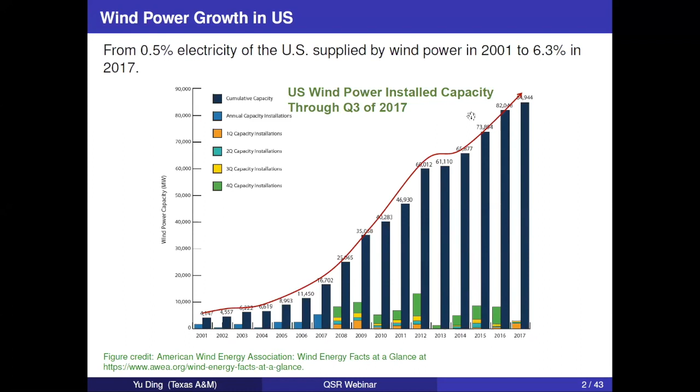So wind energy has grown from a very tiny player to a quite sizable player. It's one of the front runners among renewable energy sources. Solar energy compared to wind energy right now, this year, is almost like wind energy was 20 years ago, about 0.5% of electricity produced by solar right now.

About 10 years ago, around 2008, the US Department of Energy published a white paper and then revised it subsequently. Initially, the white paper was called '20% Wind by 2030.' The idea is the DOE contemplated scenarios where wind energy would contribute electricity produced and used in the nation: 10% by 2020, 20% by 2030, and 35% by 2050. If you think about that goal set by the DOE, it's not really very easy to accomplish.

If you look at the history, the increase from 0.5% to 6.3% took more than 10 years. Every year the increase in percentage is less than 1%, and we only have about 2 more years left until 2020. So to achieve 10% by 2020 from 2017, you'd have to increase more than 1% every year, and that may not necessarily be very easy to accomplish.

Also, from another angle, the 35% by 2050 is actually quite a big deal. If wind produces electricity at the level of 35%, you can imagine solar probably will provide electricity at 20%. So altogether, these two sources would give you more than 50% of the electricity used in the nation. If the proportion of hydropower and nuclear doesn't dramatically decrease—as nowadays they stand at 20% and 16%—then if you add all these carbon emission-free energy sources together, they'll give you 90%, 91%.

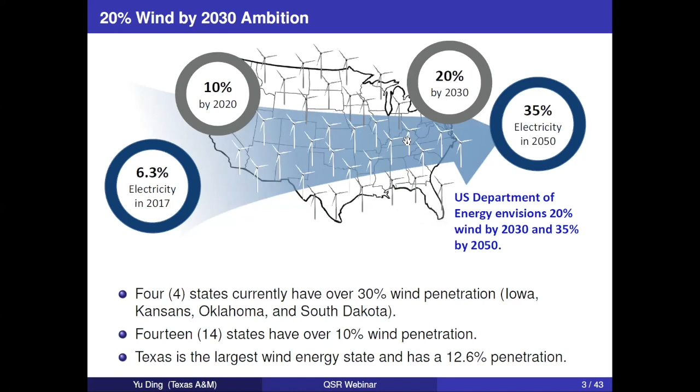One of the challenges to wind energy growth is still the marketability and market competitiveness, because for a long time wind energy cannot really compete in the market by itself. It's actually being subsidized by a mechanism called the Federal Production Tax Credit, or PTC.

Now, if you want to roughly consider what kind of energy really makes money in the marketplace, you can think of this magic number: about 5 cents per kilowatt-hour. That's the wholesale electricity price. And of course, when we use electricity at our house, we have to buy it at a much higher price, like 10 or 11 cents. That's the retail price.

So the wholesale price is 5 cents. If you can produce electricity around or below 5 cents, you're almost guaranteed to make money. If you do that at 7.5 cents, you are not competitive. In between, it sometimes depends on time and location.

For onshore wind, the cost of energy in the past number of years has been reduced to between 6 and 7 cents per kilowatt-hour. The offshore wind is still much more expensive - it's out of the range of being even close to competitive. But we have plenty of onshore wind farms.

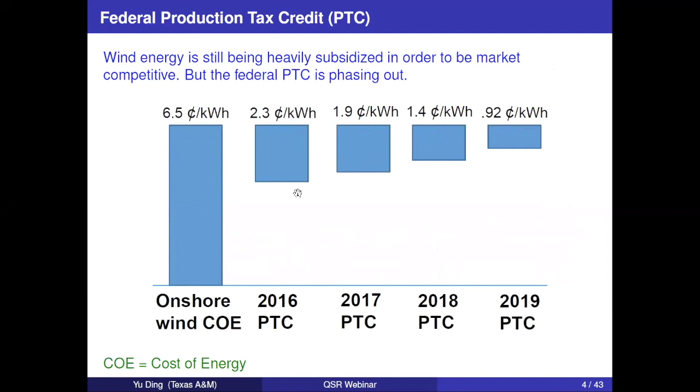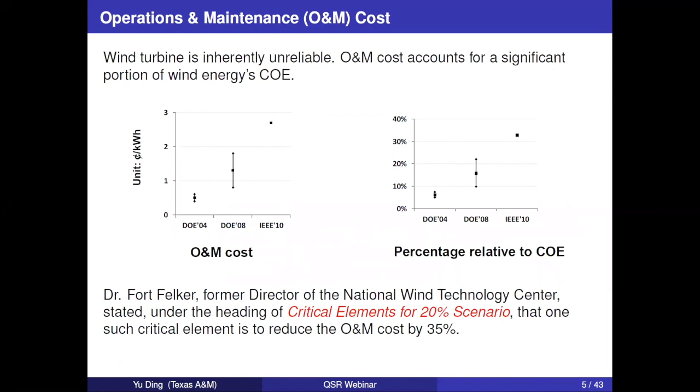So if you go back to the previous figures, if we have 6.5 cents per kilowatt-hour, you get a 1 cent reduction from the cost, and obviously you get a very significant improvement in the competitiveness of wind energy. So that highlights the O&M part - cost reduction is one of the major challenges, and also an area needing a lot of research and development.

So why is wind energy or wind turbine unreliable? This factor is really deeply rooted in the operation of wind turbines.

As you can easily imagine, wind energy is called a variable renewable source. So the driving force for a wind turbine is changing all the time. The wind is not something we can control.

So the non-stationary wind force, in fact, subjects a turbine's drivetrain to a constant fatigue load.

An analogy we often use is this: if you drive a car almost constantly at cruise speed, mostly on the highway, you'll have the car for a longer service life. But if you rarely get on the highway and instead drive in a busy city with a lot of traffic lights, stopping and starting frequently, you're going to have a shorter service life for your car.

The car driving in city life is really the type of analogy for the wind turbine, because the wind is not controllable. Sometimes you have strong wind, sometimes you don't, and the very persistent, strong wind driving the turbine to rotate doesn't always last very long. So you have the turbine going up and down in a very frequent changeover.

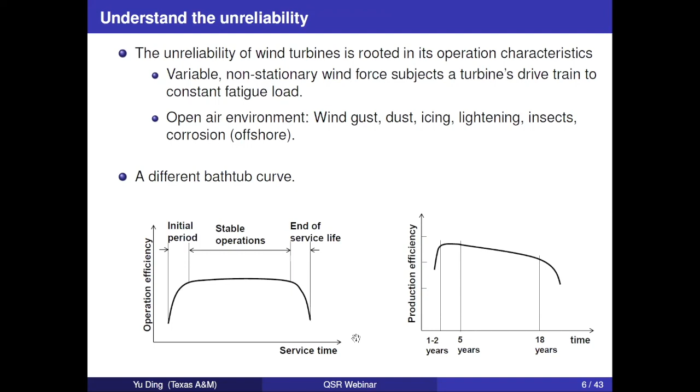The challenge or difficulty in wind turbine O&M, operations and maintenance, can be summarized with 3 keywords: size, weather, and distance. The size of the turbine is huge.

Sometimes we don't really get that feeling because we typically see a turbine from a distance. But if you take this picture from an online source and compare this wind turbine with other structures - this is a new GE turbine, and the tip height is 853 feet, almost close to 300 meters. That's very high. The hub height, the middle part, could be more than 100 meters high, and if you compare it with the Eiffel Tower, it's slightly lower than that.

People ask, you have this large structure, why can it stand there for over 100 years, and what's the problem with wind turbines? But you don't really have moving parts on top of a tower like that, or the Empire State Building. Here you have this very large turbine blade constantly rotating on the nacelle, or on the rotor, so that exercises a very strong force.

Each of the blades is also very heavy. Even a blade of about 50 meters weighs about 16 tons. So a larger turbine weighs even more, and 3 blades together are almost 50 tons. That kind of size also causes other difficulties.

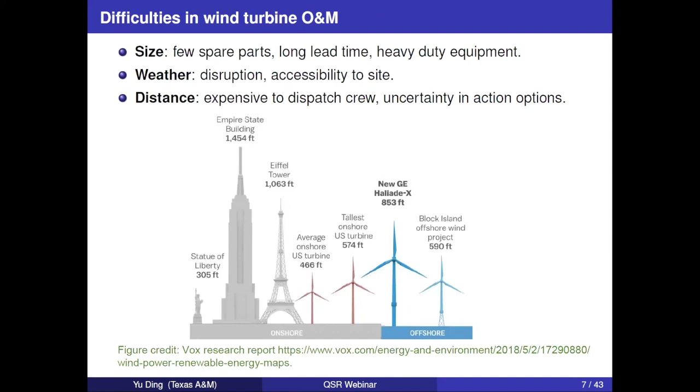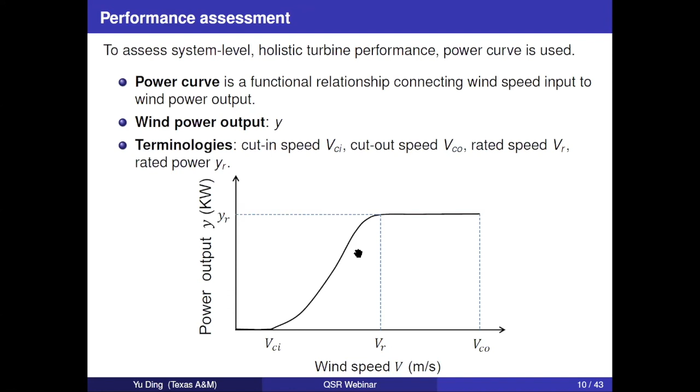And then if the wind becomes even stronger, to the level we call cut-out wind speed—this wind speed is too strong, for example 25 meters per second—a mechanical brake can stop the wind turbine at that point. So we have the reliability aspect and also the performance assessment, and the system level performance assessment is typically achieved by using this power curve.

So a data science formulation in wind energy: using the power output Y, and considering the variability or stochastic nature of the wind input, this can be expressed by a probability expression.

Here, P of X is the probability related to the wind field. It's not necessarily only the wind speed, but most likely the wind speed is the most volatile variable among all the environmental conditions. Then you have this conditional probability—given this wind input condition, how much power you're going to produce in the probabilistic sense. This is directly related to the turbine performance.

And then if you integrate out the X, you have the probability of Y, which is the probabilistic wind power production.

If we substitute Z, the extreme load condition on the wind turbine, into this equation, almost without changing anything, this equation still holds. Here the response is mechanical load Z, and still P of X is the stochastic nature of the wind field.

And then the conditional probability or conditional density, P of Z conditional on X, provides the understanding of the turbine's endurance. If you integrate out the X, you have the unconditional load on the turbine, and this is the probability of Z.

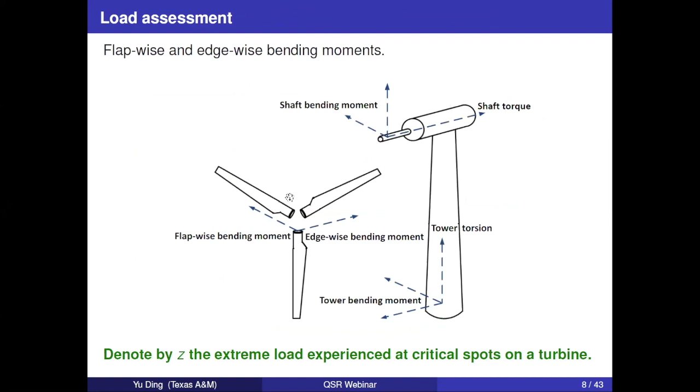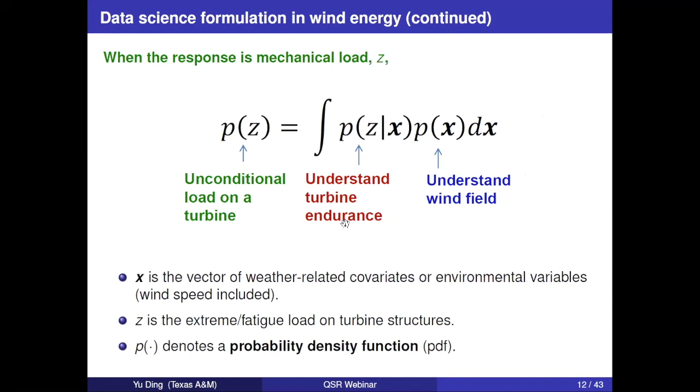And therefore, I can say with this design threshold, the L sub t we used previously, whether or not this is enough for me to avoid a catastrophic event happening. Does that help? Yeah, I believe that answered the question.

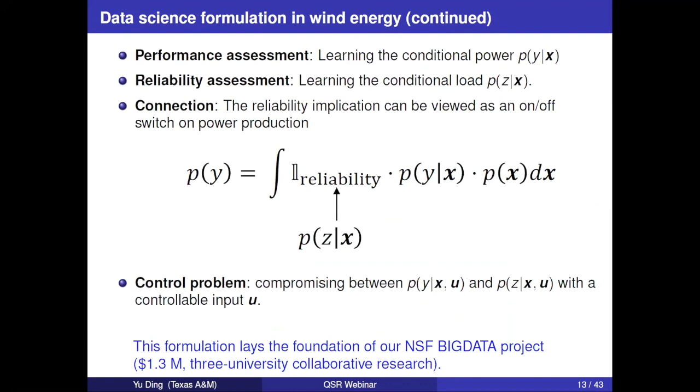Okay, so let me go a little bit further from these slides. One of the immediate questions, given the importance of performance assessment as well as load assessment, is: what do people do in industry? They must have been doing something, right? The type of method used is actually pretty simple—it's called the binning method.

The idea is very easy to follow. Suppose the response is a power output Y. So you have this kind of data—this is real data collected for one particular wind farm, a wind turbine. This is the wind speed, this is the power output. To get the power curve, industry simply partitions the wind speed into small bins, for example 0.5 meters per second.

For each bin, here is the amplified, magnified version. You can see this is bin number 1—all these red dots, the green dots, are in that bin, and you simply average all these data points, which is power data, and use this average to represent all the data points in that bin. You do that for the second, neighboring bin with all these blue dots, and average again. Now for the response, you can also fit, for example, a Gaussian distribution, or a skewed distribution like the Weibull distribution.

You can get a little bit of distribution understanding from that bin as well, for when the response is a mechanical load Z. It's not very easy to just use one simple average, because the extreme load is really related to the tail distribution. You want to calculate the tail probability.

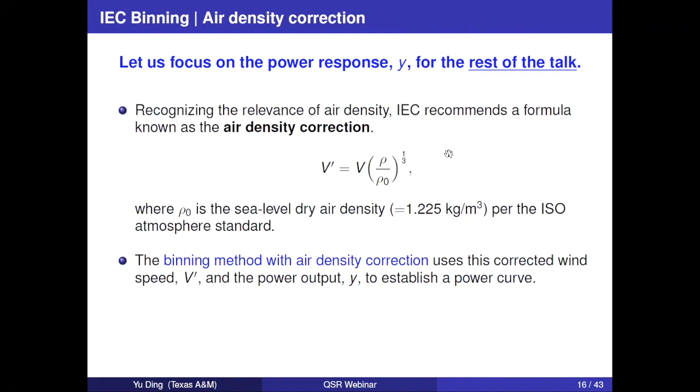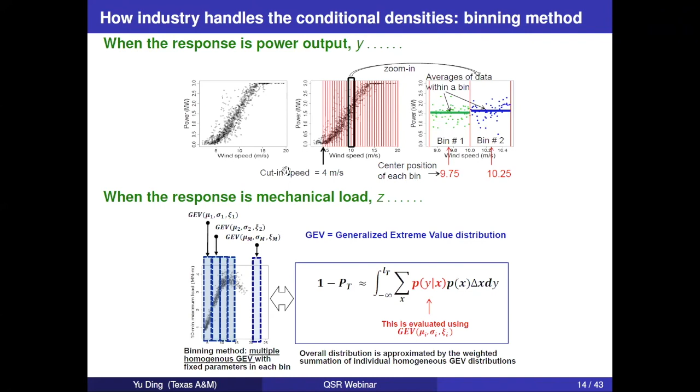Right, so this question is answered here. The power curve is generally provided by the wind turbine manufacturer. What they do for the power curve is take the data measured on-site when they do service or testing. So they have the wind speed data, the power data, and then they fit this power curve. So the power curve is very much a data-driven concept, and the way they fit the data is the binning method.

Does that answer the question? So, okay, the second question: do you just use a two-factor example to show that when more than one factor is taken into consideration, the binning method will be in trouble? Yes.

So I use the two-factor example because if you only have two factors, you're not necessarily in trouble yet. If you have like 50,000 data points a year with two factors, each with 20 bins, you still have a sufficient number of data points in each bin to either estimate average or estimate a constant parameter distribution. But typically we don't really have only two factors—you can easily go to 5 or 10 factors in a commercial setting.

And even with 5 factors, if each factor has 20 bins, you're going to end up with 3 million bins. You only have 50,000 data points. In the end, every 60 bins will share a single data point. You couldn't really do meaningful estimation anymore.

Is the data available online? Another question—no, most of the time the wind data is more kind of available. The power data you have to get directly from the owner of that wind farm.

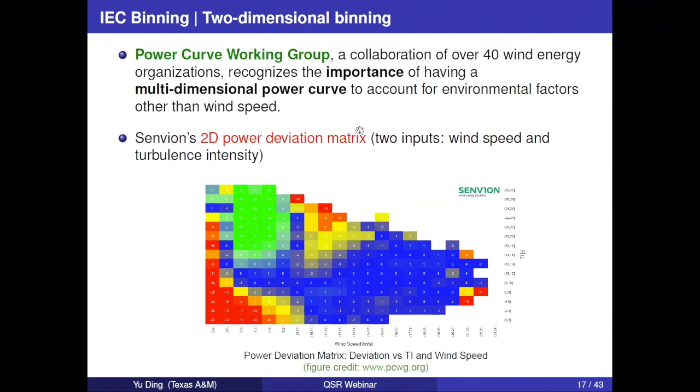Thank you. One question you probably didn't see from your screen is from Ranjin. He asked, how does one consider the spatial temporal correlation of both input and output variables in the model? That is not considered in this particular talk.

We discuss a much broader set of issues in the book. The first part is the wind speed, the wind field, which has really rich spatial temporal structure—we did some research along that line. The second part is more on single wind turbine performance, which is what we try to discuss in this talk.

For that one, we kind of isolate a single wind turbine to say, given this kind of input, how are you going to consider the output. There's also a little bit of interaction between this turbine and the neighboring turbine, which we sometimes call the wake effect, but there are special techniques to handle that.

We do have a paper about the wake effect which considers the spatial aspect in a more specialized way. That paper was published in the IEEE transactions early this year.

I see there's another question here—I think he figured out the answer himself. So I think we've answered all the questions. Okay, maybe we can go back to the presentation.

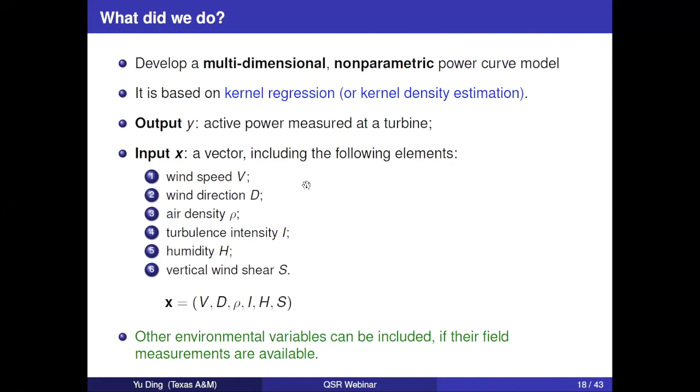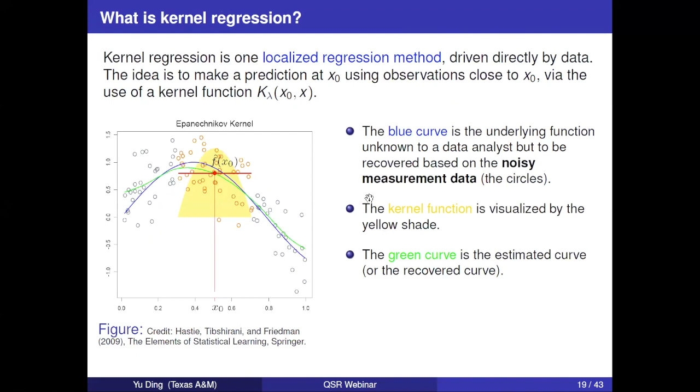I want to mention the IEC's method can actually be considered a special kernel method using a uniform kernel. The binning method works like this: you have a window, and if you're within the bin, you give a weight of 1; if you're outside the bin, you give a weight of 0.

Most kernel methods don't always use this kind of uniform bin. Oftentimes we don't use a uniform kernel function; instead we use a smooth kernel function, like a Gaussian kernel, which gives different data points a smoothly decayed weight away from the center point.

If you only have one single input, whether you use the uniform kernel function or the smooth Gaussian kernel function, it does produce some difference, but not a whole lot. The smooth kernel function will give slightly better results, which is why people like to use it, but the difference isn't very striking.

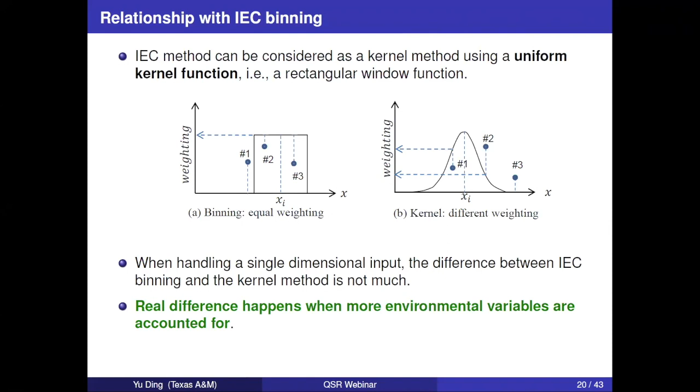The real difference happens when you incorporate multiple variables. If the uniform kernel function runs into a curse of dimensionality problem, the smooth kernel function will too. So you have to accommodate multiple input variables by devising some kind of model structure.

When designing this model structure, we make use of physical understanding, going back to the physical law of power production from those factors. There are multiple important factors, at least 3. There's a nonlinear functional relationship we don't fully know because the coefficient of power has other factors confounding with each other, and there's an interaction, because if you only use additive models, you're not very effective.

In the end, we came up with this hybrid additive-multiplicative kernel structure. It's multiplicative because each kernel element includes 3 elements to capture 3-factor interaction.

Based on physical understanding, we always have the first element as V, the second as D for wind direction, this is wind speed, and the third one changes with different environmental factors. We have an additive structure, so the whole model is scalable.

With 3 factors, you only have 1 kernel function here. If you have a 4th variable, it gets added to the second element. With a 5th variable, it gets added to the 3rd kernel element. This allows us to capture up to 3-factor interaction while giving the final model scalability.

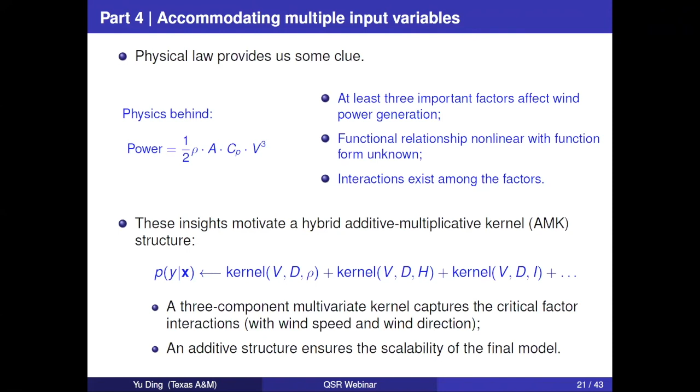What kind of impact can this make? When you compare this with IEC on multiple turbines, the error reduction over IEC is really striking—this isn't caused by randomness in the data. It's over 20 to 45%.

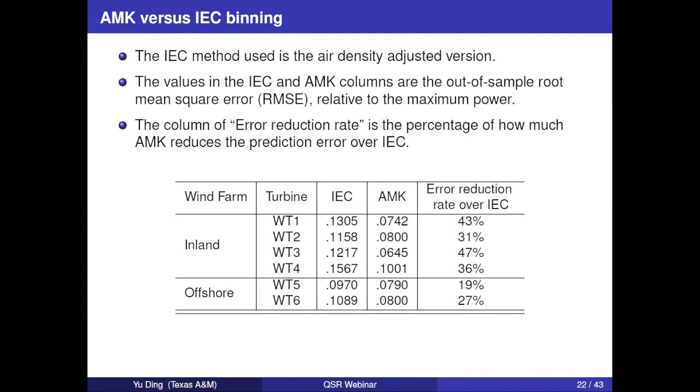We also compared with a number of other machine learning methods, because the IEC method is very simple and non-parametric, but doesn't really take advantage of recent machine learning developments. We purposely selected a few representatives for each branch of methods: KNN is a neighborhood method, SS ANOVA is a spline method, and BART is a tree method.

By comparing with these methods, you can see the AMK is pretty robust. Sometimes it comes very close to another machine learning method, but it maintains pretty consistent performance. In one case, it actually beat the best alternative by 14%.

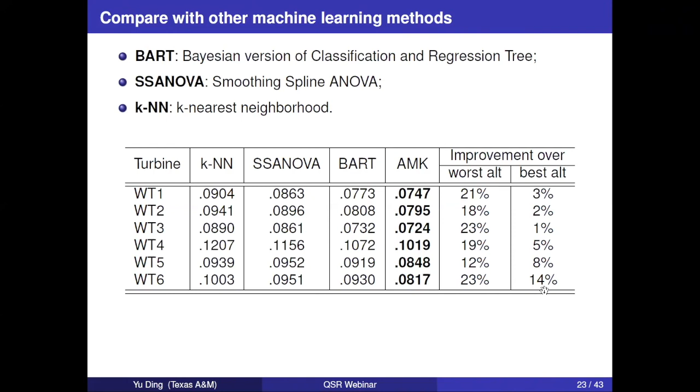So the question is, we have a better, more capable data science method which can give us a better fitting of this power curve and also account for multiple environmental variables. What are we going to use that for?

And we can use that for predicting for sure, right? So that is pretty easy to understand, and I'm not going to get into that prediction aspect here.

I want to go back to that reliability question we raised before. If you recall, we hypothesized the efficiency curve, this bathtub curve for wind turbines, is not really like typical machinery, which has a very long steady operation period. It actually has a noticeable faster decline after probably the initial 4 or 5 years. There's some initial evidence, data analysis to support this claim.

If this is true, people say, I'm not really ready to replace the wind turbine after 5 years, and it's a very costly proposition for you to do that, because installing a wind turbine is costly, and replacing that wind turbine is probably even more expensive. So what can people do about this?

There's a certain kind of technology innovation to retrofit a turbine generator, known as a turbine upgrade. Hopefully by that retrofit, you can lift this kind of curve up a little bit, even substantially, and therefore have a longer stable operating condition, just like other turbine machinery.

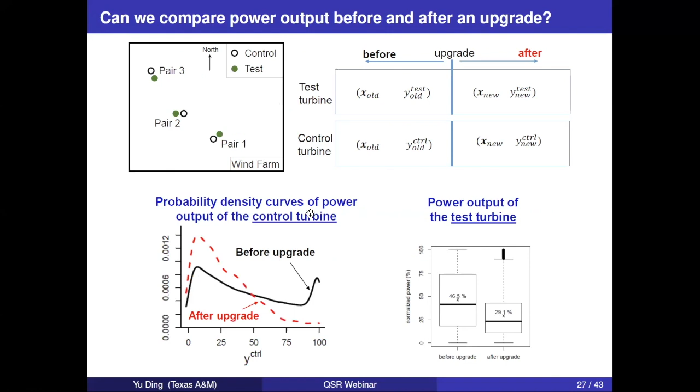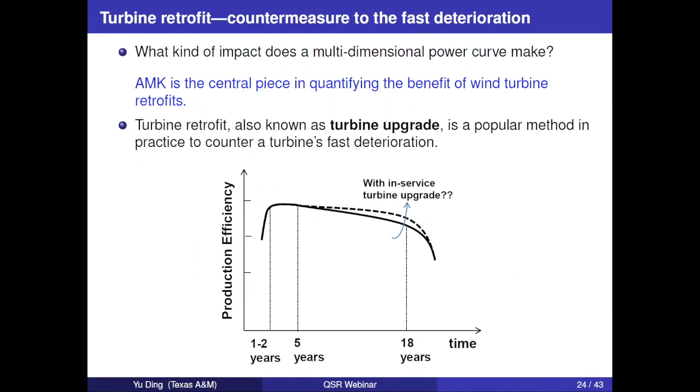But detecting this kind of small improvement in a very noisy environment is not very easy. If you remember all the data we've seen up to this point, the noise is much more than 3%. How can you detect this kind of small change and certify it's the correct detection and not just noise? That's become one of the main challenges.

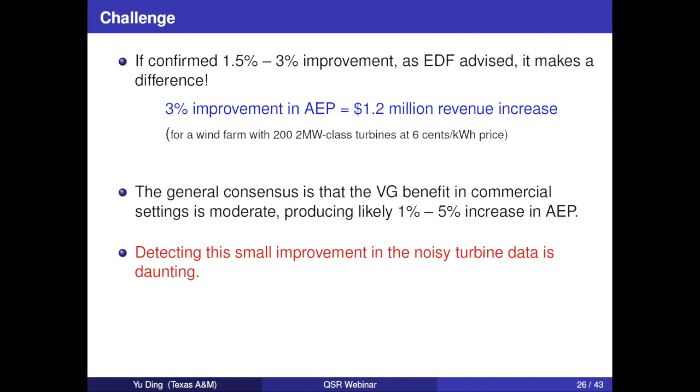Let me go to the part where we said why the AMK helps. The key issue is really controlling the environmental condition, because when you compare directly the difference between the power production before and after upgrade, even if you see a difference, that could be because the wind blows harder or weaker. And here what we do is we use the model AMK to capture the old turbine operation characteristic.

This is the AMK here. By using this model to train the AMK, it's almost a mathematical surrogate of the old turbine - almost like you take a picture of the old turbine and capture how it operates. And then you feed the X new to the model. This is like running the old turbine under the new condition. And then you compare this predicted output with your observed output. If there's a difference, it's more believable the difference is coming from the part you made the change to the turbine.

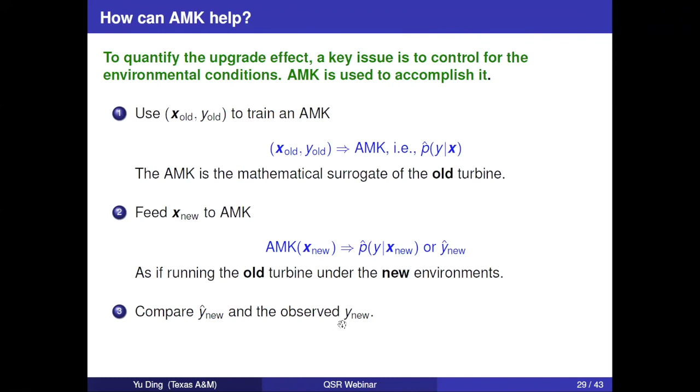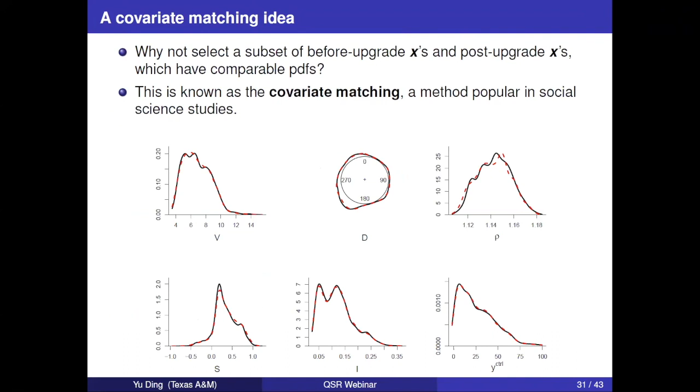Now this is the general story. Actually, when we dive deeper to solve the problem, it is not so easy - there's other complexity involved. And one of the complexities is related to the bias part, because it's different, but sometimes you have this kind of bias, and the bias also can run from 2 to 5%.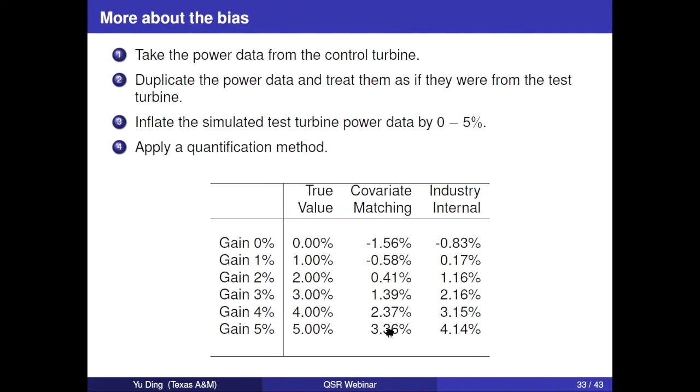And here is one of the slides - if you ignore this part, because it's a different kind of method - they basically said if we do the simulation study with the actual improvement we know, sometimes they have almost like 2% difference. Yet the one you want to detect is about 2%. So with that 2% difference bias, it's not very easy for you to pinpoint exactly how much effect you're going to have. Even sometimes you're going to be very hesitant to say it is positive effect or negative effect if your effect starts with a small number, for example 1%. But if you have 2% negative bias, you could end up with negative 1%.

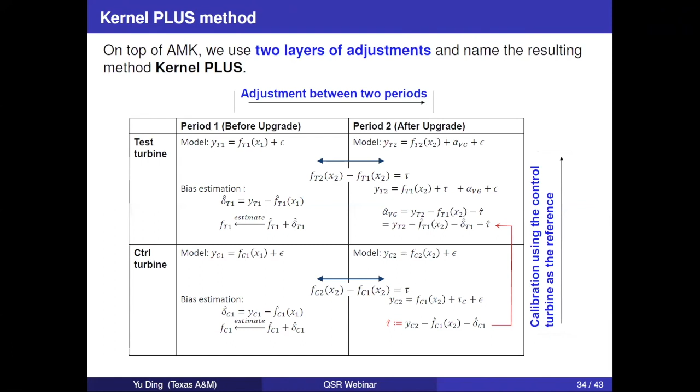Okay, so we did something to address that issue, and in the end we have a version of the kernel method. We call it the AMK kernel plus. It's really AMK with that bias correction, and we are not able to entirely eliminate the bias altogether, but we were doing much better than the existing method.

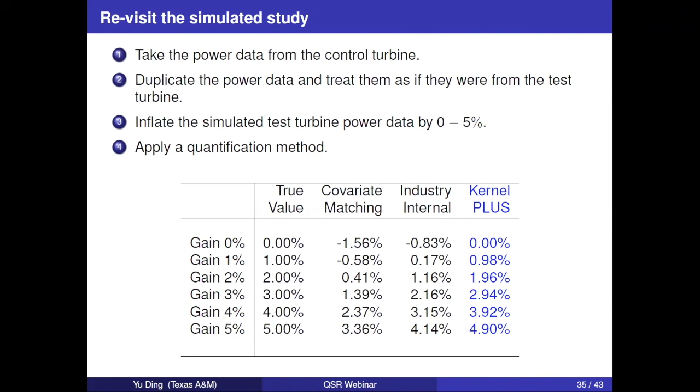But this is only demonstrated on the simulated result. And for the real power production, because you couldn't run the experiment, it's very hard to compare with the actual - you don't really know the actual upgrade effect. So people said, how can you validate this?

And we did a blind study with one of the major power companies. They provided us 3 wind turbines with the data, but they didn't tell us how many turbines had this upgrade added, or whether any turbine was upgraded at all. They only said there are 3 turbines, analyze the data and tell us what you see. So there were 4 possibilities: 0 turbines upgraded, 1 upgraded, 2 turbines upgraded, or all 3 upgraded. So we did all the analysis, and eventually we told them the 3rd turbine is the one being upgraded.

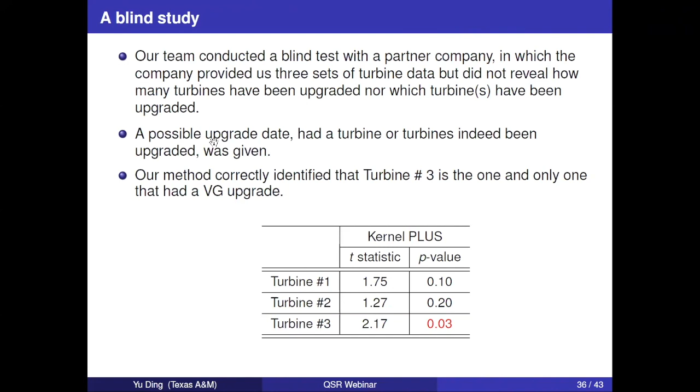They kind of confirmed our detection is correct, because they wanted to do the blind study without telling us the underlying truth up front. They were afraid we'd overfit the data just to try to confirm the result. So the blind study lent a certain degree of credibility to our method.

We also did a joint study with this small company, Smart Blade, because once they heard about our analysis and method, and they have their own internal method, they wanted to do a study with us. The study showed a high degree of consistency between their method and our method. For this study, they only gave us the data and asked us to do the analysis without telling us what result they had in the first place.

We did a 2 wind farm case study. One is a medium complexity terrain, and another is a very flat terrain analysis. In both cases, we saw a high degree of consistency between their industry method and our method.

Last year, upon knowing about the joint study we did with Smart Blade, EDPR, which is the 4th largest wind owner operator and has had a long relationship with us, decided to sponsor a year-long fine-tuning of this kernel plus method. We did extensive case studies with them using their own data, which came from 3 different wind farms, 3 different turbine types, and 10 pairs of turbines.

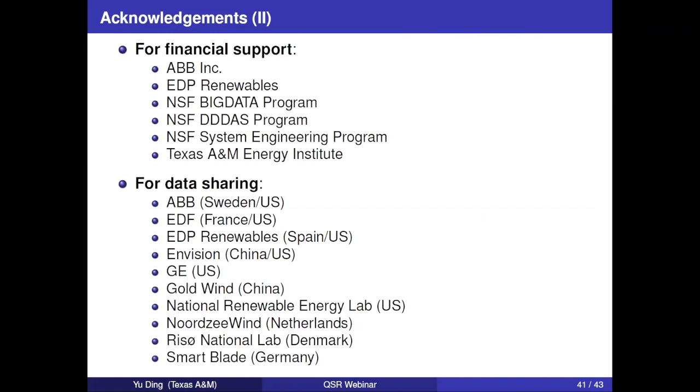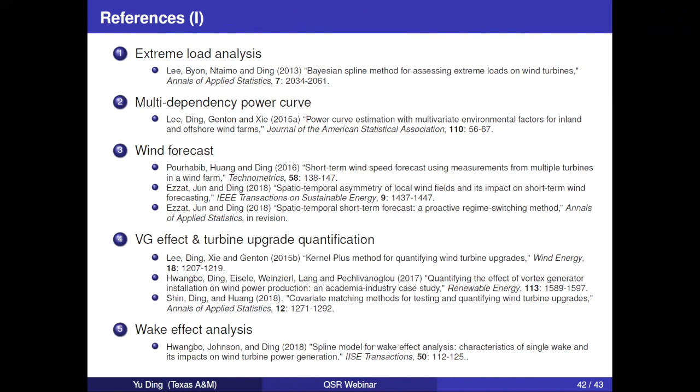This concludes the talk. I really want to acknowledge the former and current students who contributed to this research, and all the financial support, data sharing, our industry partners, and the federal government who provided us support. The last 2 slides are the references and papers, in case you want further detail.

I'd like to stop here, and if you have further questions, I'd like to entertain them. Apologies for rushing through the later part of the slides.